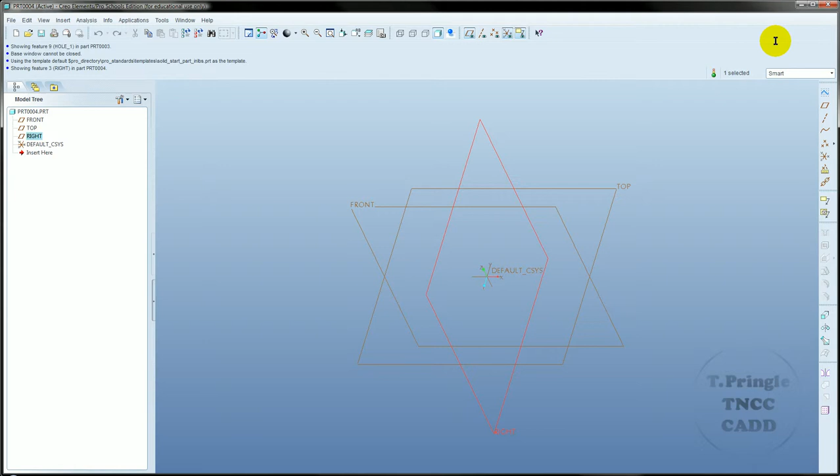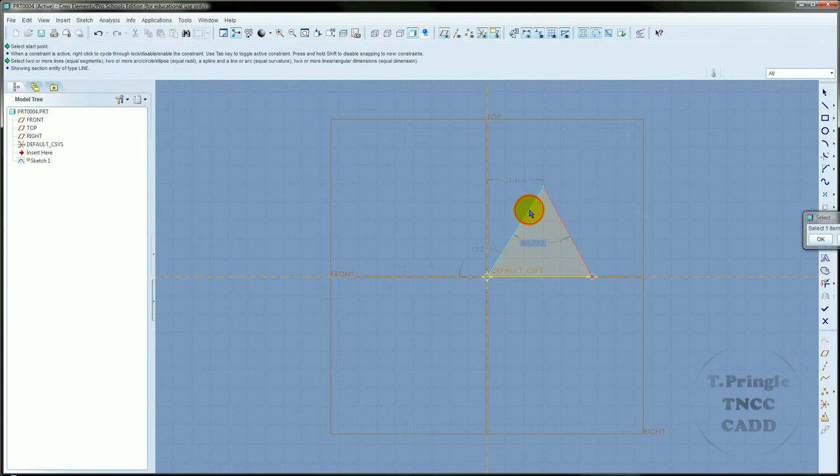So first I'll just start by going to a new part, and I'm going to sketch this out on the right plane. So I'll go to right and click sketch. Now what I'm going to do is I'm going to begin just by drawing my lines to form my triangle. So there is my triangle for this object. I want to set an equal constraint between this line and this line, and now I can add my dimensions. This dimension right here is going to be 60, and the overall height is going to be 51. So I'll put in the 51 right here, and that is my first sketch.

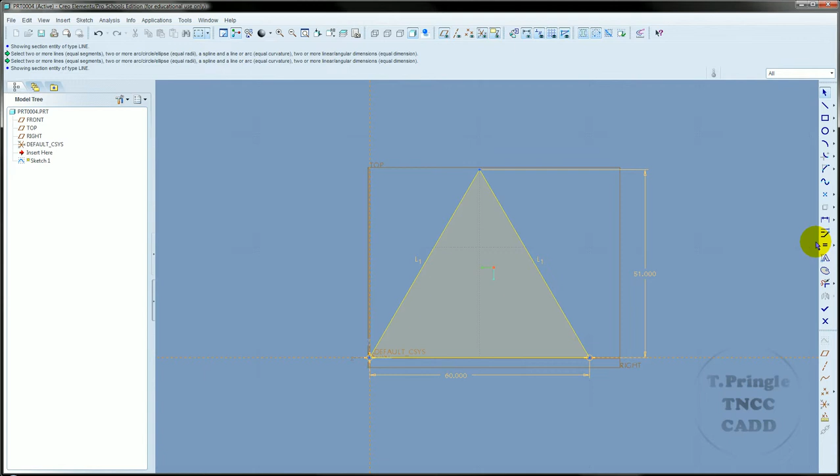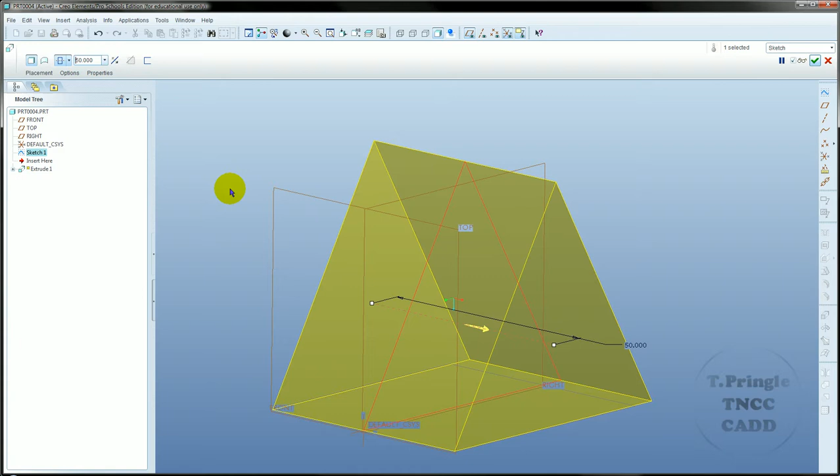Now, to make my life a little bit easier, what I'm going to do when I extrude this is, rather than extruding it in a single direction, I'm going to extrude both ways. That's going to keep my center plane intact so that I can use it for other operations that I need to do. The total thickness of this is going to be 50. Once I have that, I can go ahead and click the checkbox.

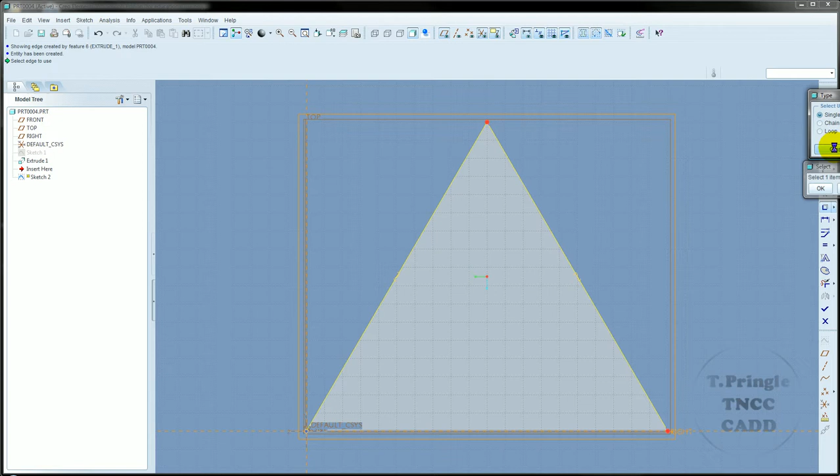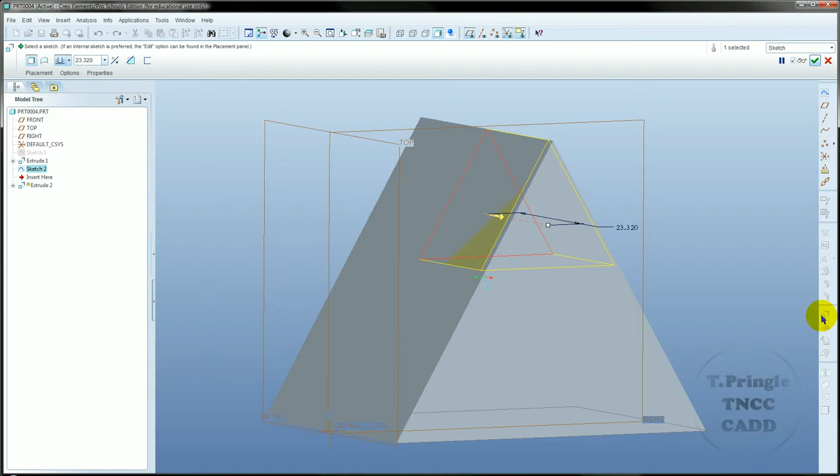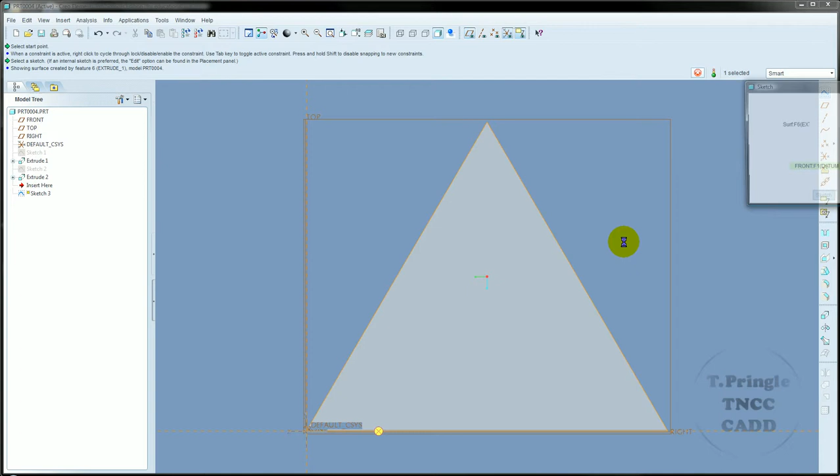I can finish that sketch and extrude. Now again, I want to extrude both directions, a total of 20, and I want it to remove material. Hit the checkbox, and now I've got that particular cutout created. I can now then left click on this side, do a new sketch, go to the use command, select both of my lines again.

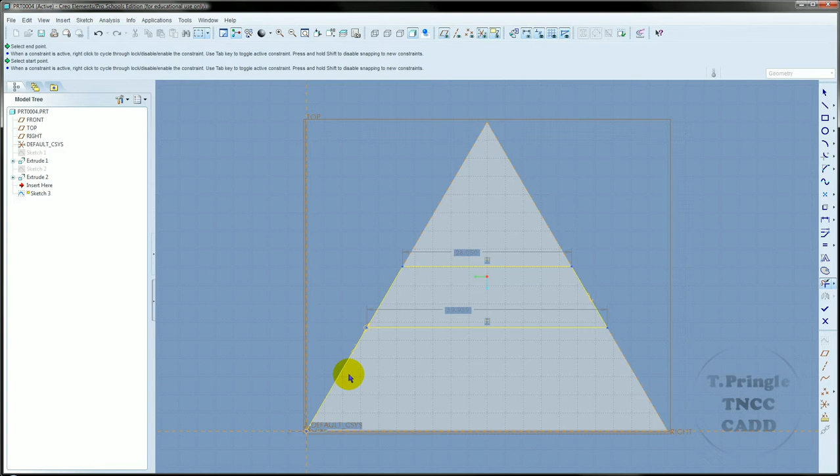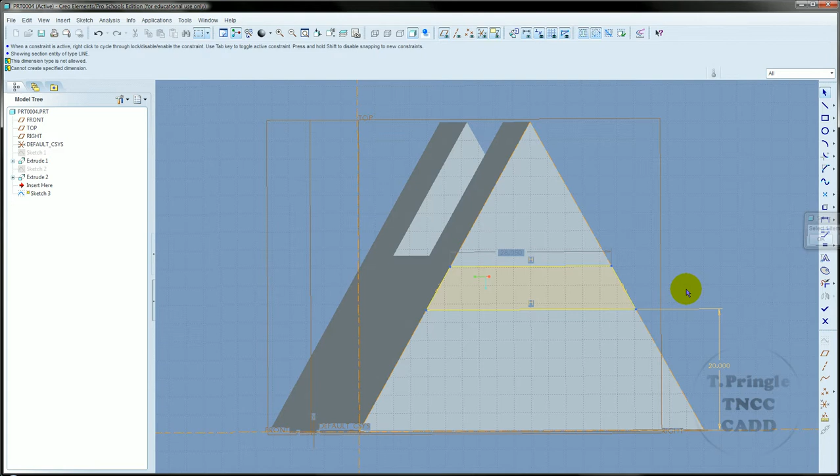Now I need to draw two lines, making sure that I don't accidentally put them on the midpoint. I want to dimension these. I don't want them to automatically be located for me. Use delete segment to remove the 4 segments outside of this box, and I now have my shaded region. I need a dimension from the bottom of the groove to the bottom plane, or the bottom axis, which is 20, and a distance between the two, which is 10. I can then say OK to that.

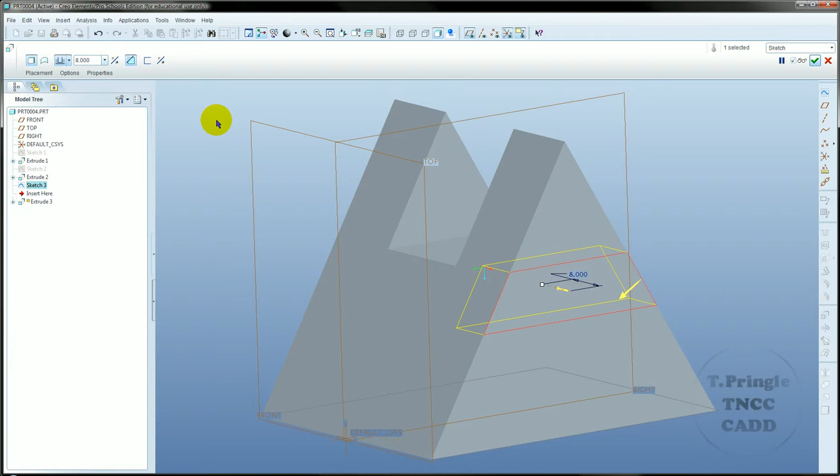Now I'll finish that sketch, extrude. It goes in 8, goes the other way and removes material. Now I'm going to do the next operation kind of quick, but when I hit the checkbox, it creates that groove, and the groove is already highlighted, so I can go right to mirror feature, grab my plane, and hit the checkbox, and it automatically throws the other one right over here. Because it was already selected, and I used extrude both directions, keeping this middle plane intact.

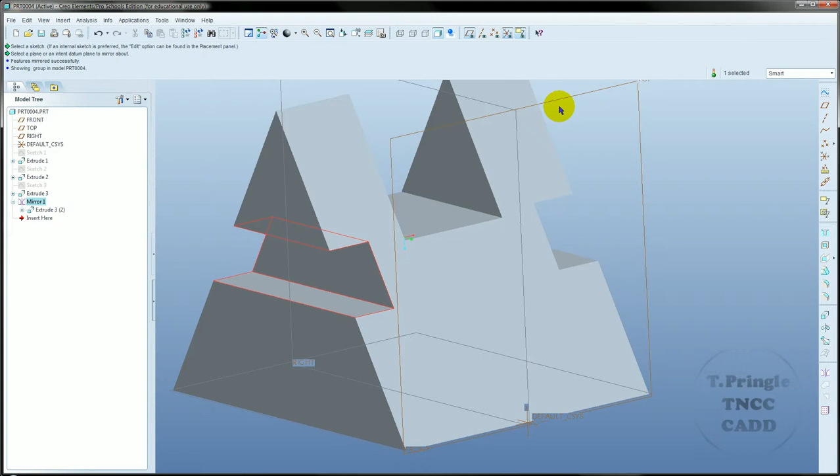The last thing I want to do is I want to create the hole. Now, there's a lot of ways that you can create this hole, but I'm going to go ahead and use the way that I feel is the best way to do this. First, I'm going to click the hole command. Then I'm going to click this plane as the location for my hole. And then I'm going to select my offset references. My offset references are going to be the bottom and the right edge.

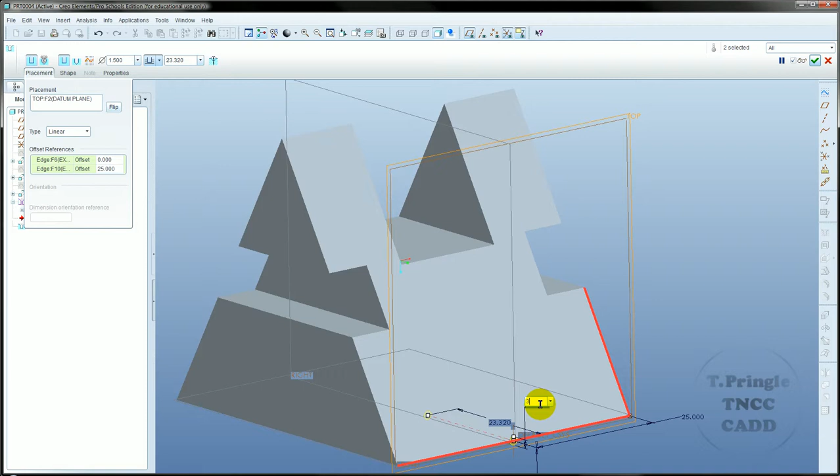From the bottom, it's 0 because it rests right on the bottom. From this edge, it's 25. Has a diameter of 1.5. And it goes through all. I can now hit the checkbox and it'll go ahead and create that hole. And this is exercise 8.